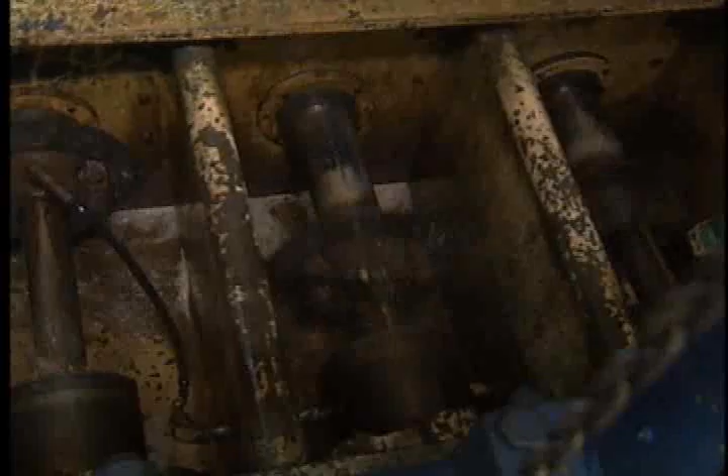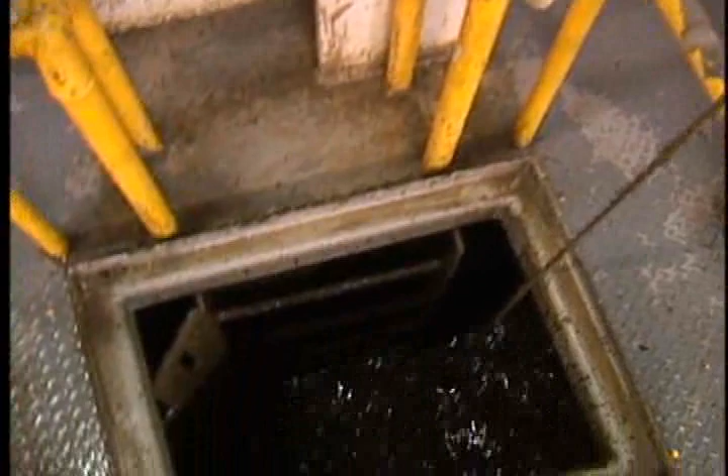In this program, we'll concentrate on mud circulation. Mud is the pit watcher's concern. It's in the hole where mud does most of its work. It jets out of the bit and carries cuttings to the surface. Also, mud cools and lubricates the bit, keeps the borehole from caving in, and holds formation pressures in check.

That's right, a hole properly full of mud that has the correct weight or density keeps formation fluids that are under pressure from entering the hole.

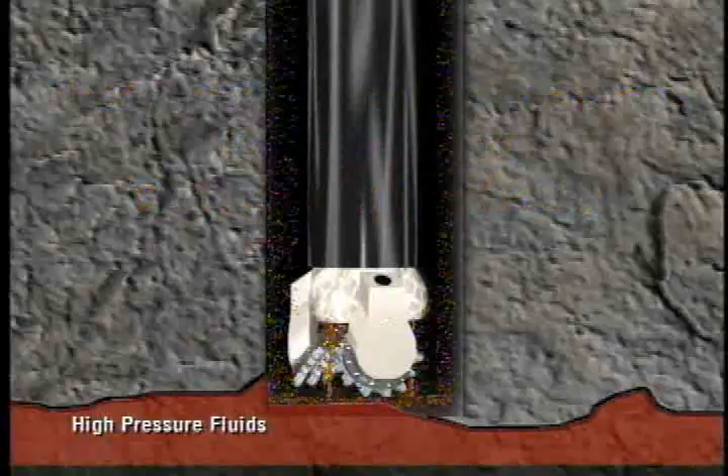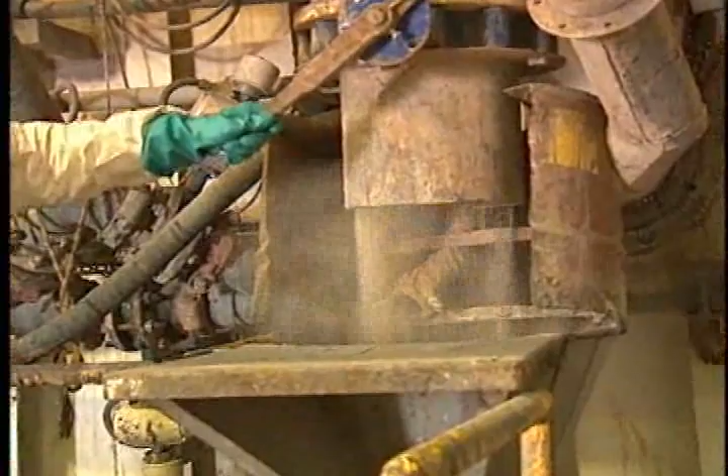Water, oil, or both form the base of most drilling mud. Rig crew members add clays and minerals to the basic liquid to give it desirable properties. One is the mud's weight or density. To find out a mud's weight, you can use a mud balance.

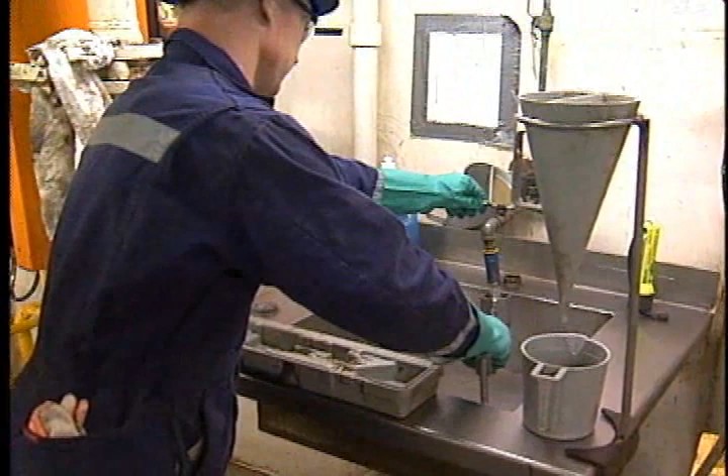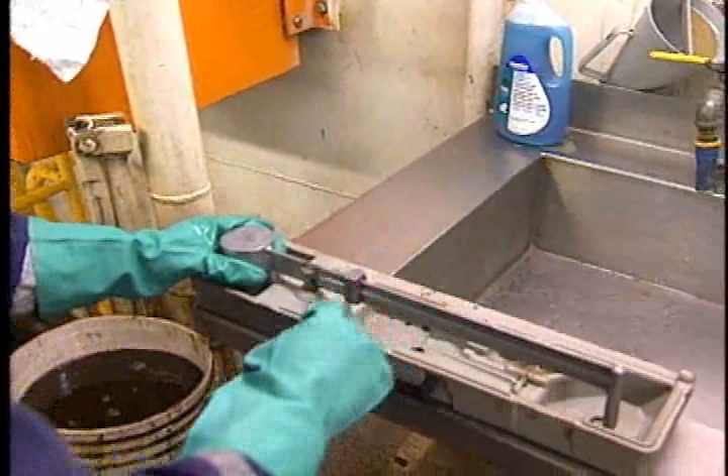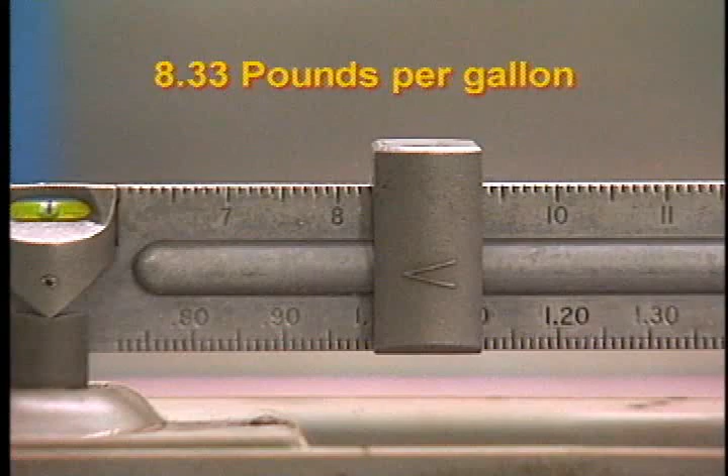First, let's watch a crew member weigh clear water. Looks like the water weighs a little more than 8.3 pounds per gallon. This mud balance is correctly calibrated because cleaned fresh water weighs 8.33 pounds per gallon.

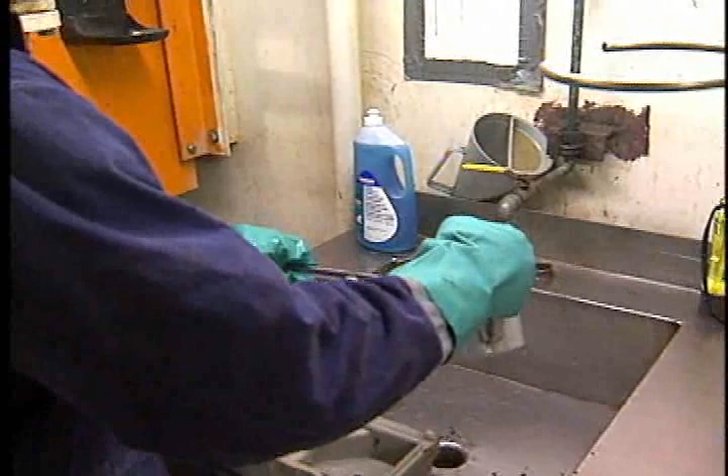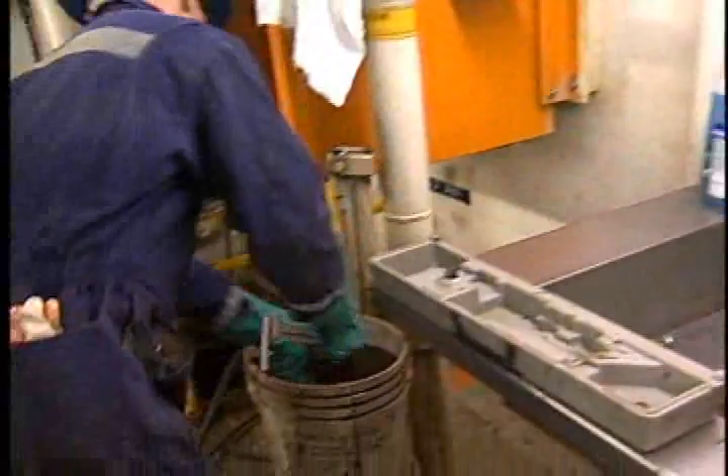Now, let's watch him weigh a sample of drilling mud that has clays and weighting material in it. This particular mud weighs about 14.6 pounds per gallon. Mud weight is important because the more mud weighs, the more pressure it exerts on the bottom of the hole.

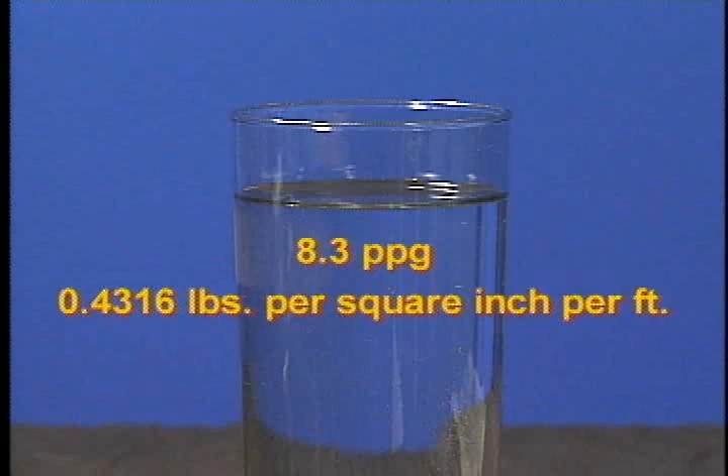For example, clear water that weighs 8.3 pounds per gallon exerts 0.4316 pounds per square inch per foot of depth. So here's a hole 1,000 feet deep full of water. The water exerts 431.6 psi at the bottom of the hole.

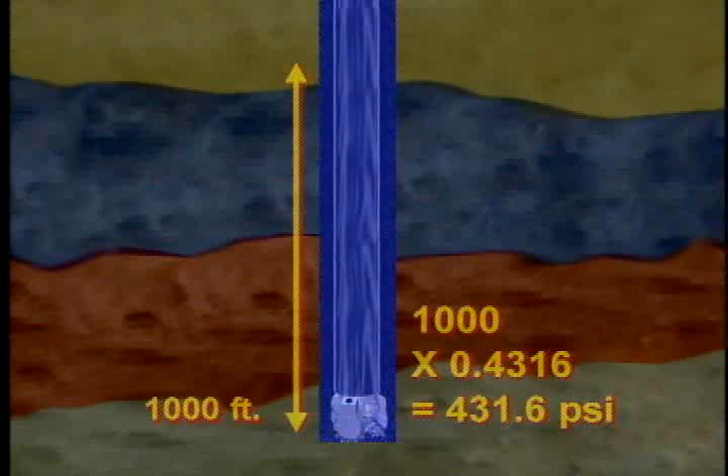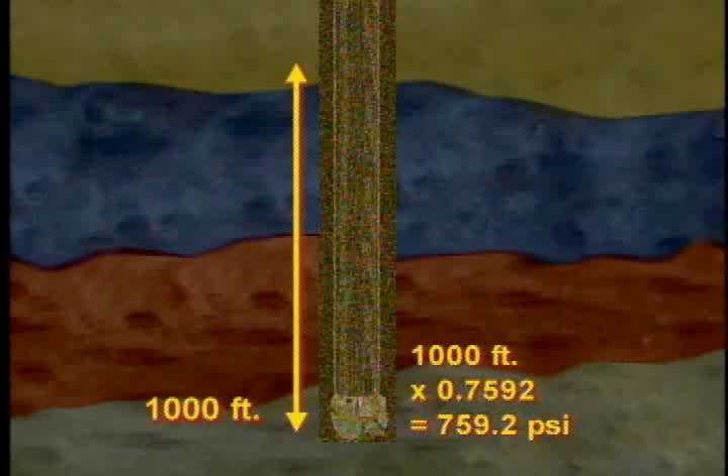Here's the 1,000-foot hole again, but now it's full of mud that weighs 14.6 ppg. This mud exerts 0.7592 psi per foot. Thus, the pressure on the bottom is now 759.2 psi. The heavier mud exerts over 300 psi more than clear water.

But what if the mud is not dense enough? Its weight is too low and it doesn't develop enough pressure to offset formation pressure. Formation fluids flow into the well. This is called a kick.

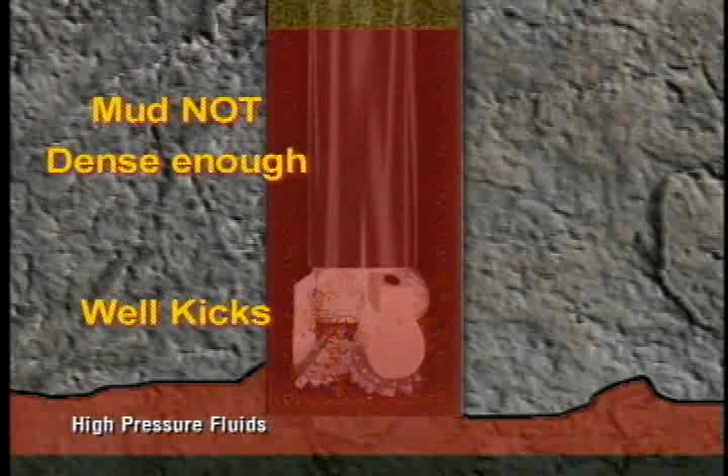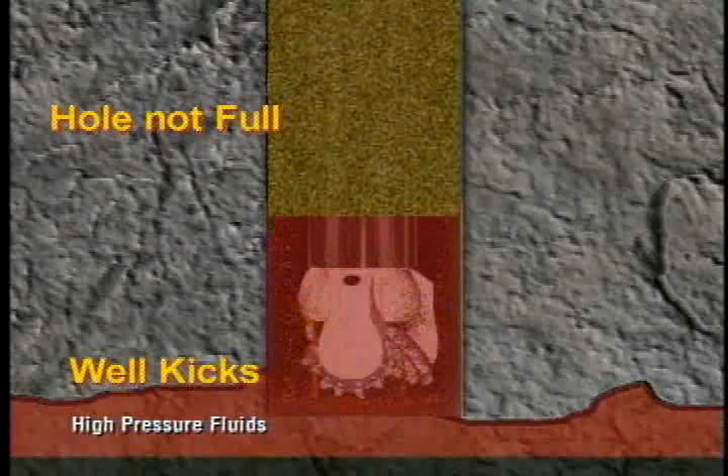Or what if the hole is not full of mud of the proper density? Same as before, formation fluids enter the hole. The well kicks, and if the rig crew fails to control a kick, the well could blow out. Nobody wants this to happen. It's dangerous, costly, and should never occur.

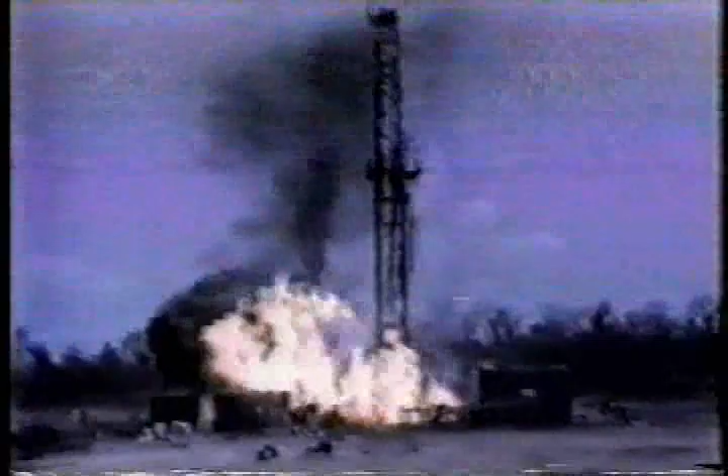And here's the thing: if you're assigned to watch the pits on your rig, you play a big part in preventing this. So, pit watching is an important job. In this program, we'll cover the responsibilities and duties of the pit watcher.

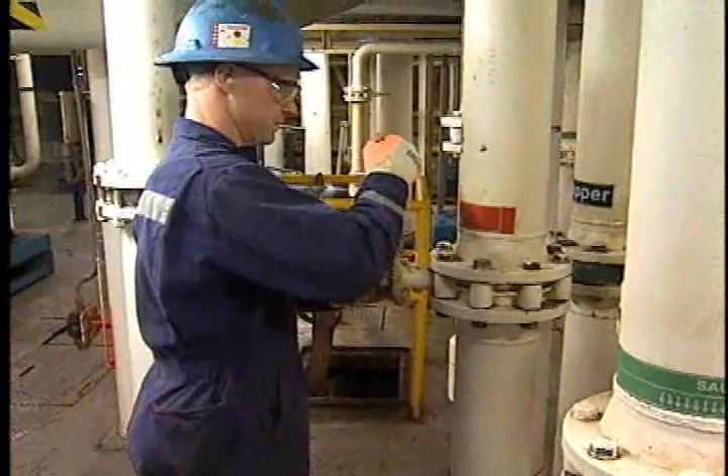In a nutshell, the pit watcher's main job is to observe, record, and report to the driller any changes in what's going on with the mud. The duty station is around the mud tanks, or pits as they're commonly called.

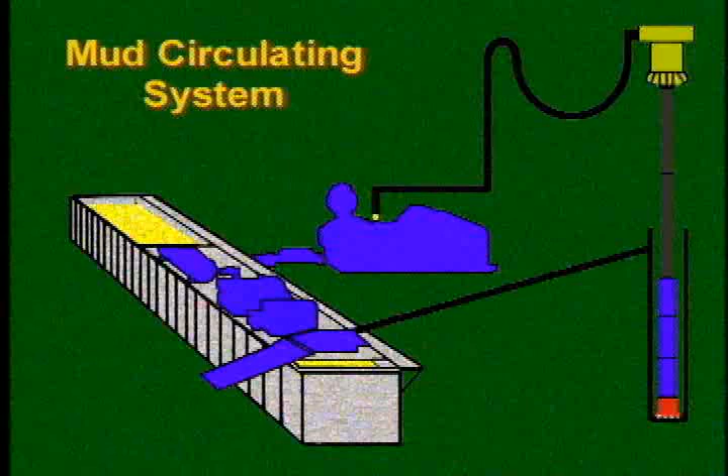To better understand the job, let's look at the basic parts of the mud circulating system. First, the pump sends mud through the discharge line, up the standpipe, into the rotary hose, and through the top drive. Mud then goes down the drill string and out of the bit, where it picks up cuttings and cools the bit. Carrying cuttings, the mud moves up the annulus, the space between the drill string and the bore hole.

At the top of the hole, the mud flows into the return flow line. It then falls through the shale shaker and into the first mud tank or sand trap. The shaker helps condition or treat the mud by removing larger cuttings.

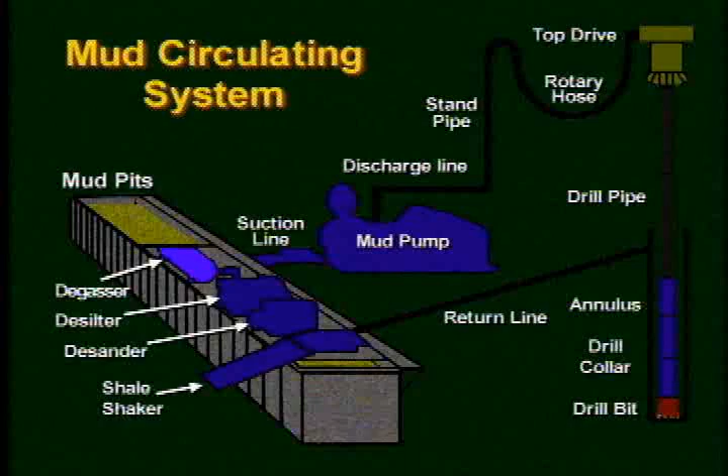Once in the tanks or pits, the mud may go through a desander, a desilter, and a degasser before going down the hole. Sometimes it goes through a mud cleaner and centrifuge too.

For details, let's start at the shale shaker. This vibrating set of screens removes cuttings from the mud as it returns from the hole. It's the first piece of cleaning equipment the mud encounters after it leaves the mud return line. It's something like a big sifter or sieve.

For the shaker to do its job, you have to keep it properly adjusted. Here's how a properly adjusted shaker looks: the last of the mud falls through the screen near the end, virtually all the cuttings are running off the screen, and no mud flows with the cuttings off the screen.

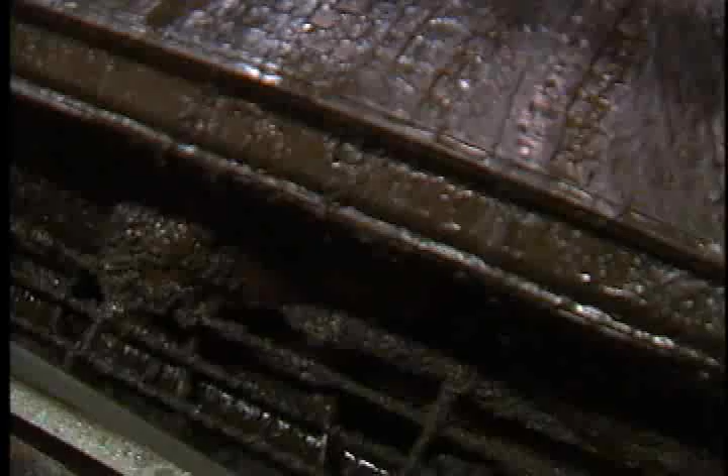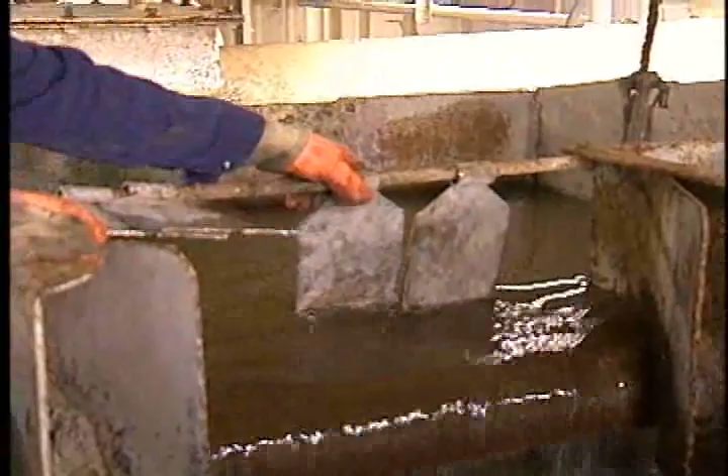It's easy to correct problems. First, adjust the flow to decrease the amount of mud flowing over the screen. Then increase the flow a little at a time, until the last of the mud falls through just before the screen's end. The cuttings will fall off the end of the screen.

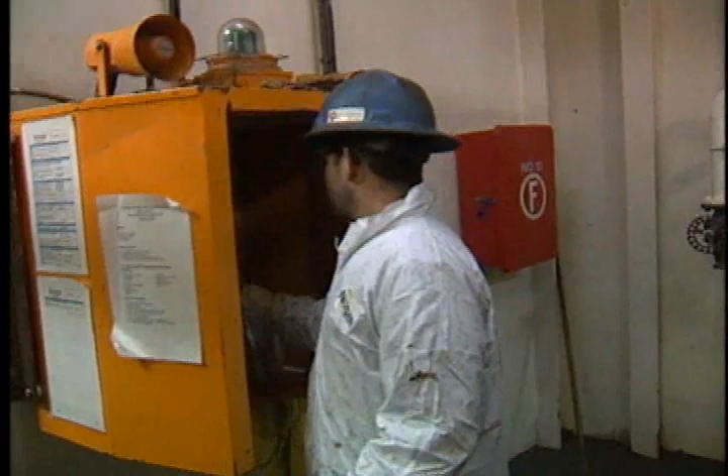Keep your eye on the cuttings. What you're looking for is changes, like a change in size or shape—they get smaller or bigger—or a change in the amount, more or fewer cuttings than before. Cutting changes indicate downhole changes. Maybe the bit has simply penetrated a new formation. But it could also be that a kick is about to occur or has occurred.

After the shaker, the mud may flow through a degasser. It removes small volumes of gas the mud picks up from a downhole formation.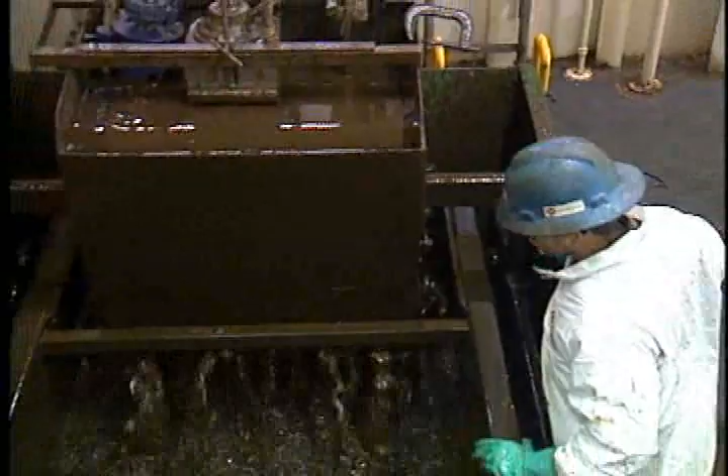Be alert for gas cut mud. It has a bubbly or frothy appearance. Notify the driller if you see it. He may have you turn on the degasser.

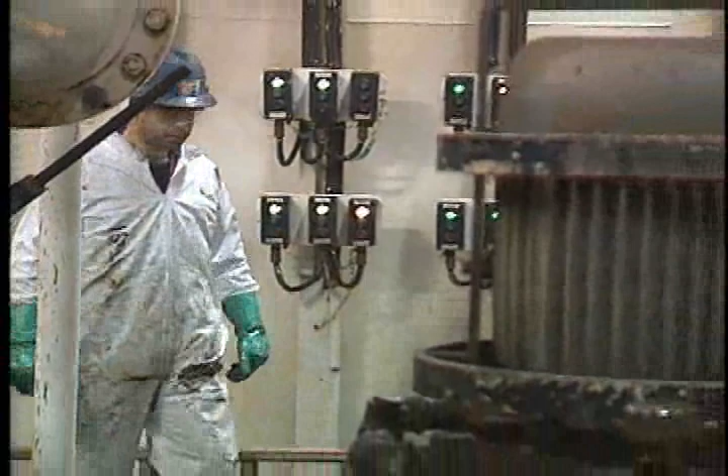Don't recirculate gas cut mud. The gas can cause the mud pump to gas lock. A gas lock pump cannot pump efficiently. What's more, gas lowers the mud's weight. Thus, recirculating gas cut mud could lead to a kick.

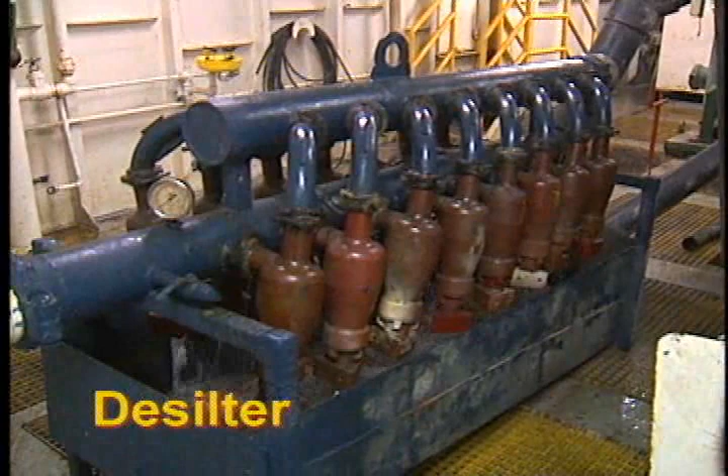After the shaker, the next piece of cleaning equipment the mud may go through is a desander. After the desander, mud usually goes to the desilter. Both remove small solids from the mud that fall through the shaker. The desander removes larger particles, the desilter the smaller ones.

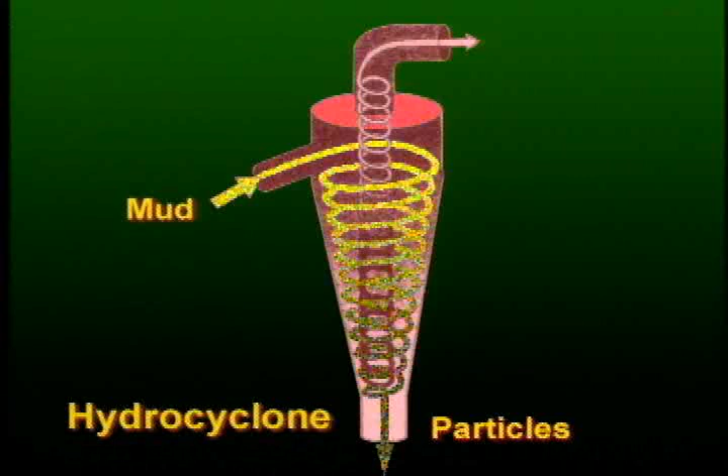Both work the same way. Mud enters through the side, hits the cone, and rapidly swirls around like a cyclone or a tornado. Centrifugal force carries the heavier particles down through the bottom of the cone. Vortex action discharges the clean mud out of the top of the cone.

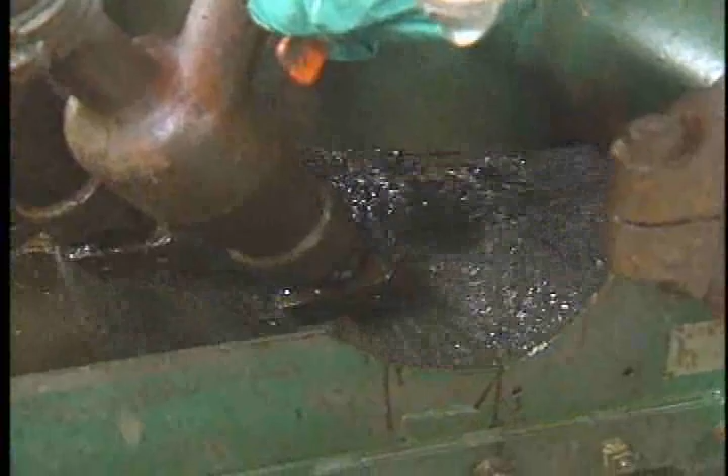You need to check the stream of mud leaving the bottom of the cone. It should look like this, a spray in the shape of a hollow cone. But this is wrong, the discharge is like a rope. To correct the problem, all you do is adjust the flow until it's right.

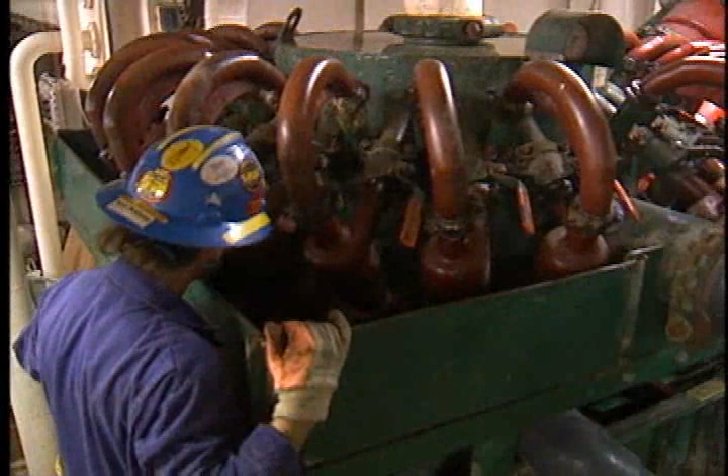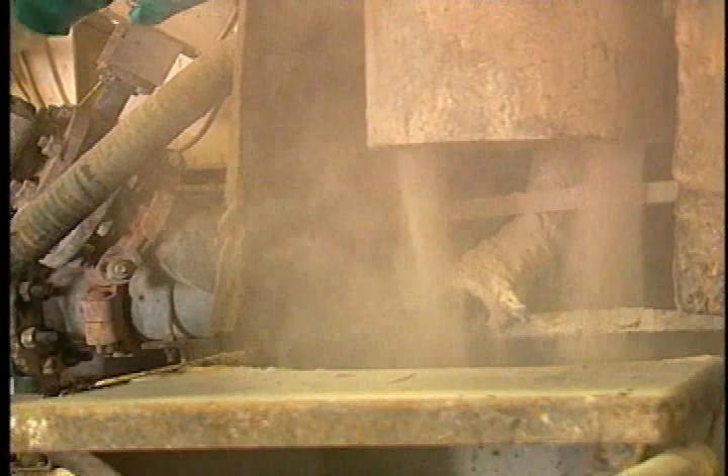A mud cleaner has hydrocyclones, like a desilter, but it also has a vibrating fine mesh screen below the cones. It removes almost all the solids from the mud except barite. Barite is a heavy or dense mineral added to the mud to make it weigh more. A mud with barite in it holds formation pressures in check. And actually, by installing an even finer mesh screen, a mud cleaner can remove barite from the mud. Barite's expensive, so it pays to retrieve it.

Adjust the lever to keep the discharge in the form of a cone-shaped spray.

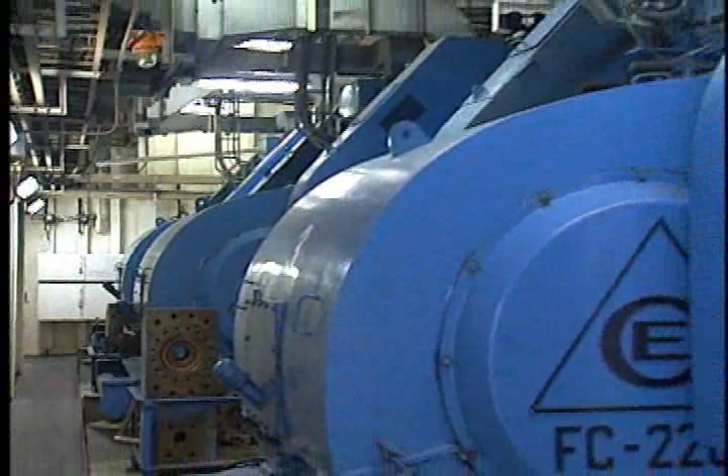Besides keeping an eye on the mud cleaning equipment, a pit watcher also needs to monitor the level of mud in the pits or tanks. Here's why. Mud circulates through a closed system. That is, the same mud circulates over and over. So if you see a gain or loss in the level of mud in the tanks, one of four things is happening.

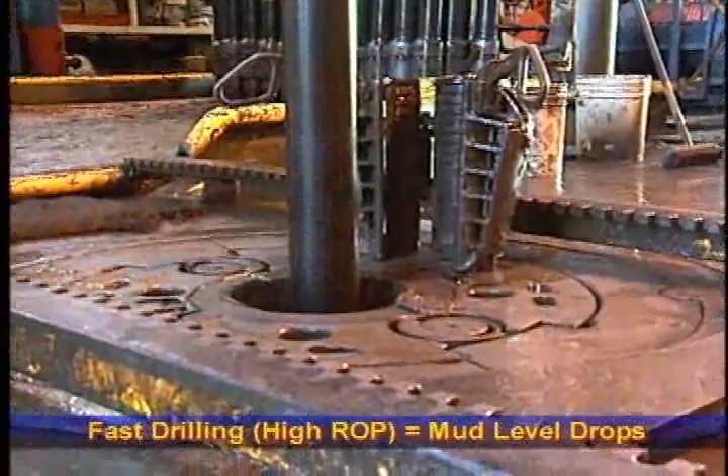First, when the rig is drilling fast, when the rate of penetration, the ROP, is high, the mud level in the pits drops noticeably. The mud fills the increasing volume of the deepening hole.

Second, something changes on the surface, like when you or other crew members mix, jet, or transfer mud. In such cases, the pit level may increase or decrease. It depends on whether you add to or take mud from the pits.

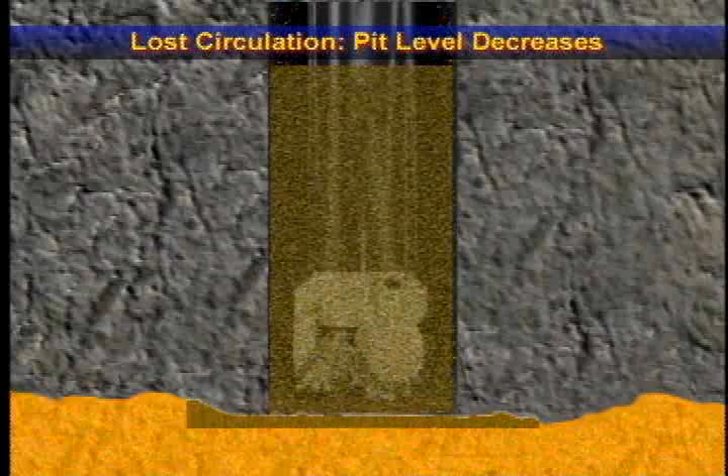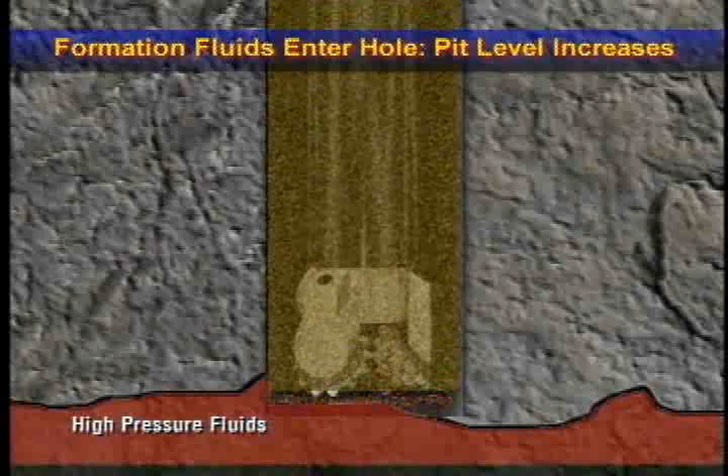Third, the hole penetrates a formation that takes mud. This is lost circulation. Consequently, pit level decreases as mud goes into the formation. Fourth, formation fluids enter the hole. The well kicks, pit level increases. Formation fluids can enter the hole either during drilling or tripping.

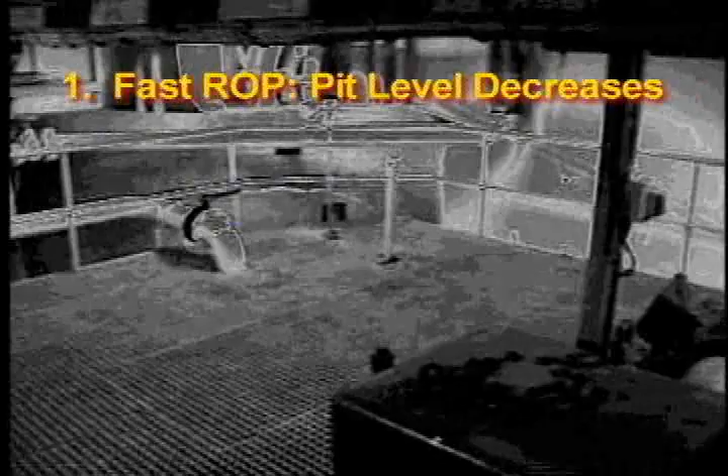To summarize: 1. Fast ROP, pit level decreases. 2. Surface changes, pit level increases or decreases. 3. Lost circulation, pit level decreases. And 4. Formation fluid entry, pit level increases. Pit watcher, be aware of changes in pit level.

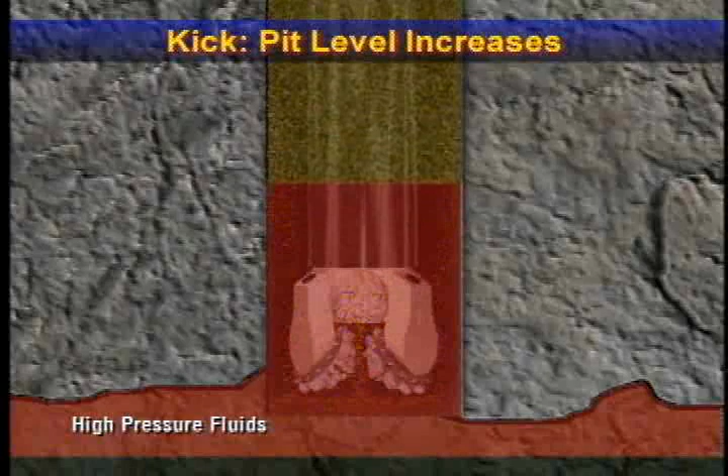If you ignore changes, serious problems can result. For example, a kick causes the pit level to increase. If not controlled, the well could blow out. So, if you detect a pit gain, an increase in pit level, and you haven't done anything on the surface to account for the gain, notify the driller right away.

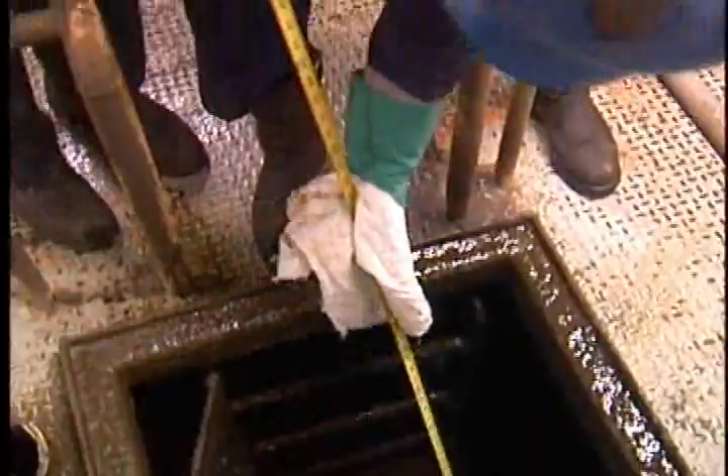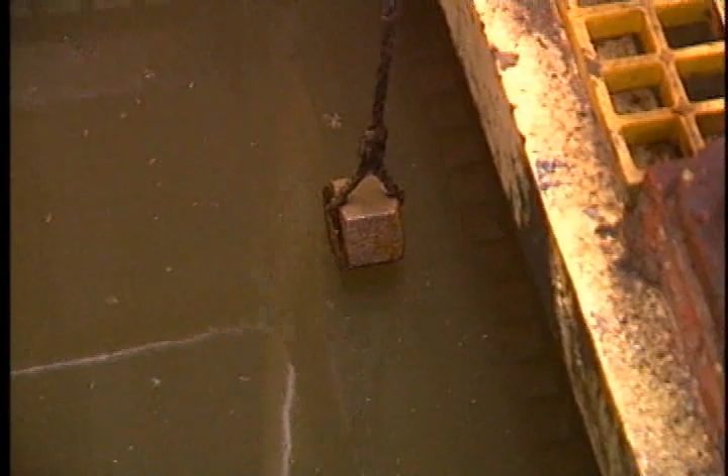One way to check for a change in pit level is with barrel or cubic meter gauges like these. Another way is to hang a steel nut on soft line near the mud level in the pit. Looks primitive, but it's fail-safe. So keep your eye on the level of mud in the pits and report any changes to the driller.

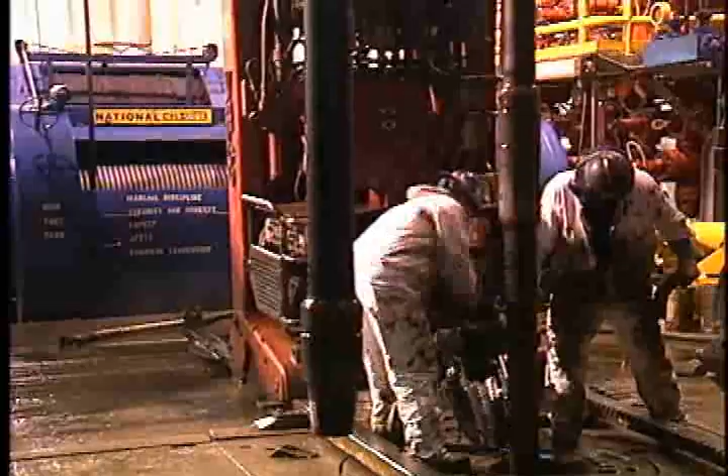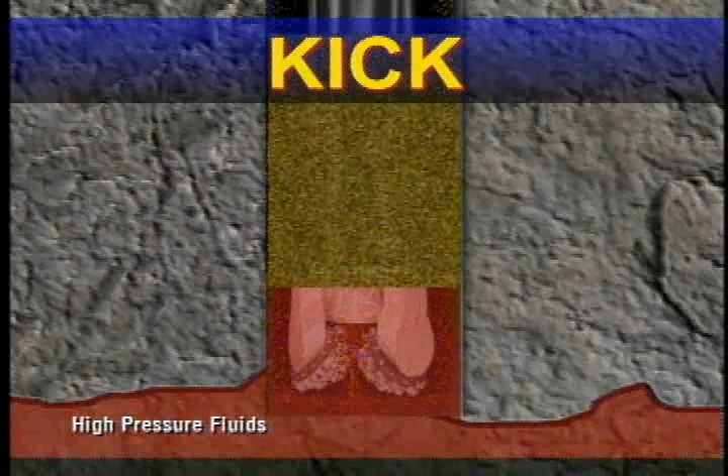You have to be especially alert to pit level changes when the floor crew trips pipe out of or into the hole. Keep in mind, a hole properly full of mud of the correct weight cannot kick. But if the mud level in the hole drops so the hole is no longer full of mud, the well can kick. With the hole not full, the mud doesn't exert the correct pressure.

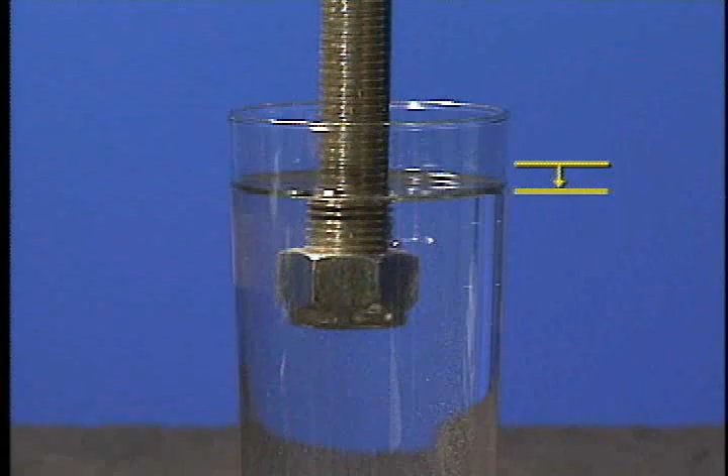So when the floor crew pulls pipe from the hole, the mud level in the hole drops. It's just like removing a rod from a container of liquid. As the steel comes out, the mud level falls. It's very important to put mud in the hole to replace the pipe taken out.

But here's another wrinkle. When pulling pipe, the drill string and bit can act like a piston in a cylinder. The bit pulls or swabs formation fluids into the hole. Swabbing is a lot like filling a syringe. The plunger inside the syringe is like the bit in the hole. The pressure drop created by the plunger or bit pulls the fluid right in.

The hole may actually be full of fluid, but not uniformly full of mud. The mix of mud and formation fluids may not have the proper weight or density. Swab in enough formation fluids and the well can kick.

During trips, the driller keeps careful track of the amount of mud he puts into the hole to replace the drill string steel. He compares the amount the hole should take with what it actually took. If the figures don't match, he knows he may be swabbing fluids into the hole.

As a pit watcher, be aware that when the floor crew trips pipe, you need to keep a close watch on the level of mud in the pits. Report a pit gain immediately.

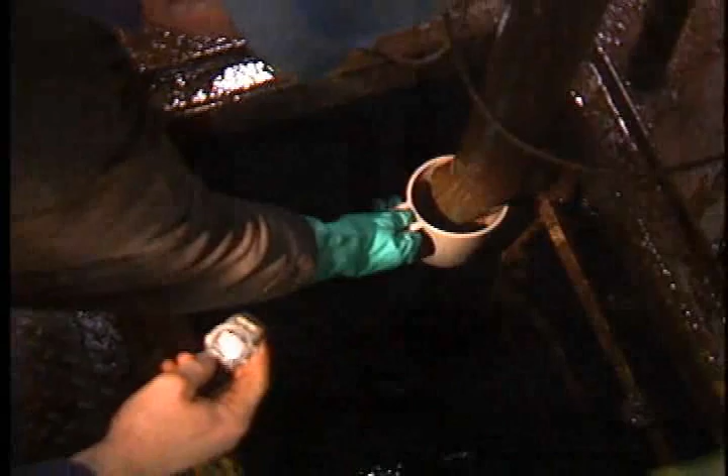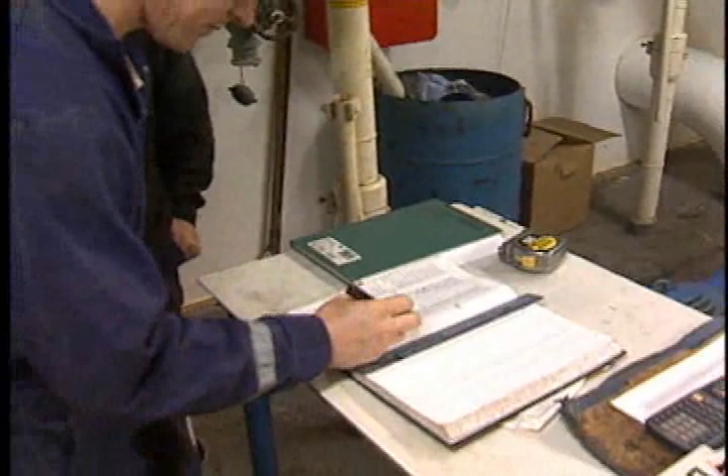Another pit watcher job is to catch a sample of mud and measure and record its temperature. Here it's 68 degrees Fahrenheit. Knowing the mud's temperature is important because certain muds perform best at certain temperatures. Also, temperature changes can signal the possibility of a kick. So carefully measure and record mud temperature every 15 minutes during drilling operations.

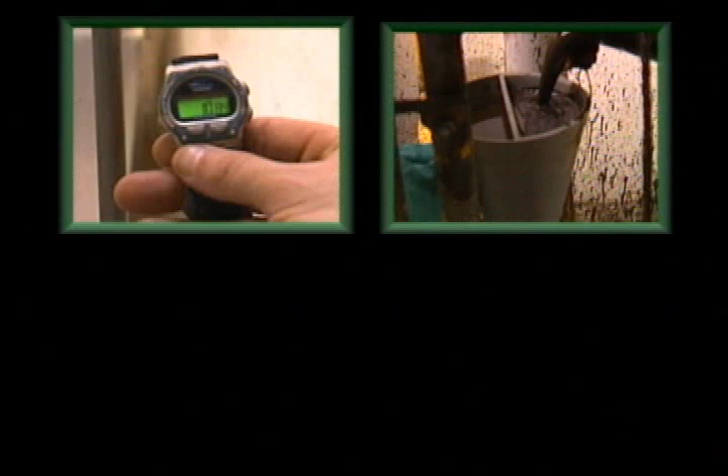For the next measurement, pour the sample through the screen in the top of this special funnel. It's called a marsh funnel. At this point, all he's doing is filtering out any lumps in the mud sample. Now get a stopwatch, your mud sample - you'll need a little over a quart or a liter, a graduated container to catch the sample, and the marsh funnel. You're going to measure the mud's viscosity, its resistance to flow.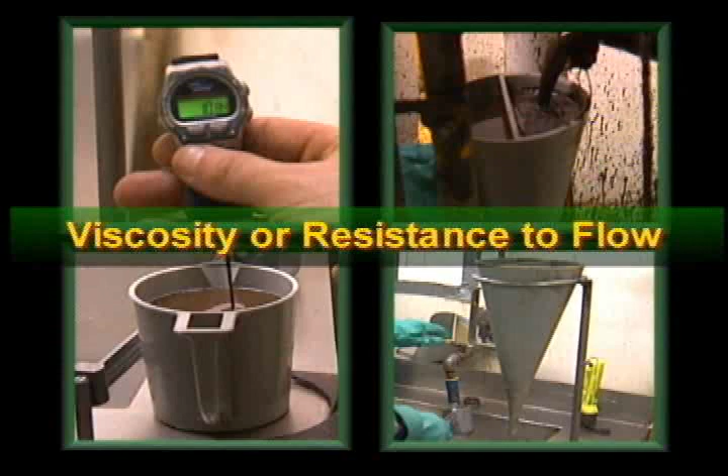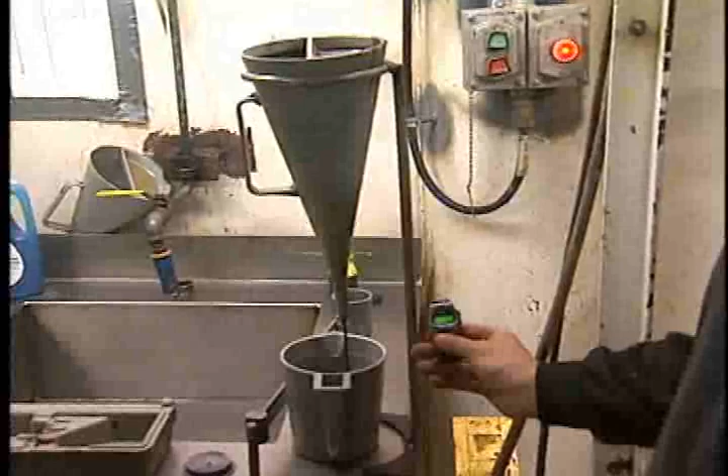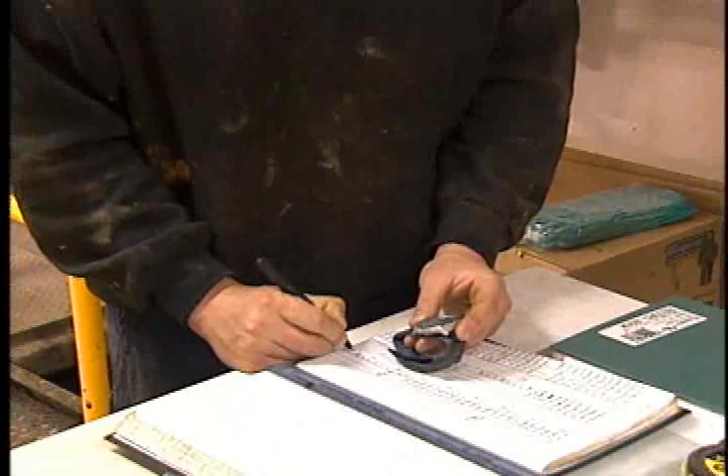First, stop up the end of the funnel with your finger. Then fill the funnel with mud. Next, start the stopwatch, and at the same time remove your finger from the end of the funnel. Let the mud flow into the cup. Carefully note when the mud fills the cup to the full mark, the 1 quart level. At this point, stop the watch. Finally, note the number of seconds it took for the quart of mud to flow from the funnel into the cup. Write this number down on your mud log.

Here the mud's funnel viscosity is 70 seconds. When drilling, you should perform this test every 15 minutes, 24 hours a day. If you notice a change in viscosity, report it immediately to the driller. A viscosity change could mean that formation fluids have entered the hole - a kick may be in the making.

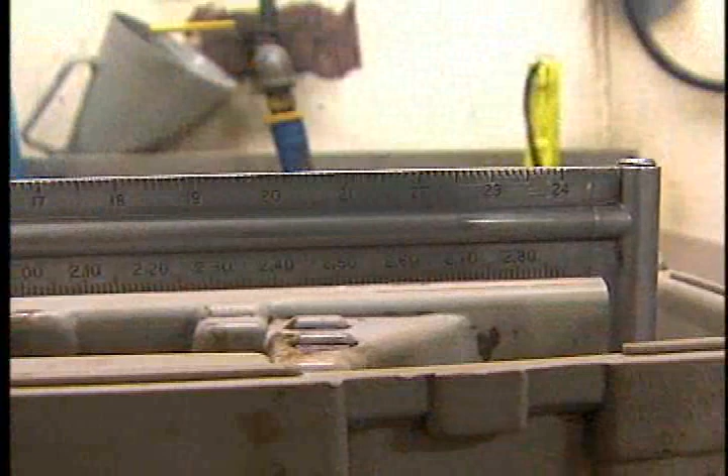The next job is to determine the mud's weight or density. Mud weight is important because it keeps the well from kicking. You use a mud balance like this to weigh the mud. It has a beam with a sliding weight, calibrated to show the mud's weight. This one has pounds per gallon at the top and specific gravity at the bottom.

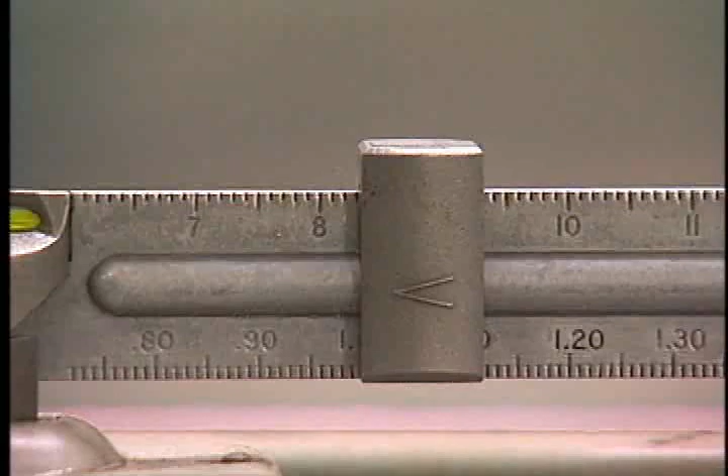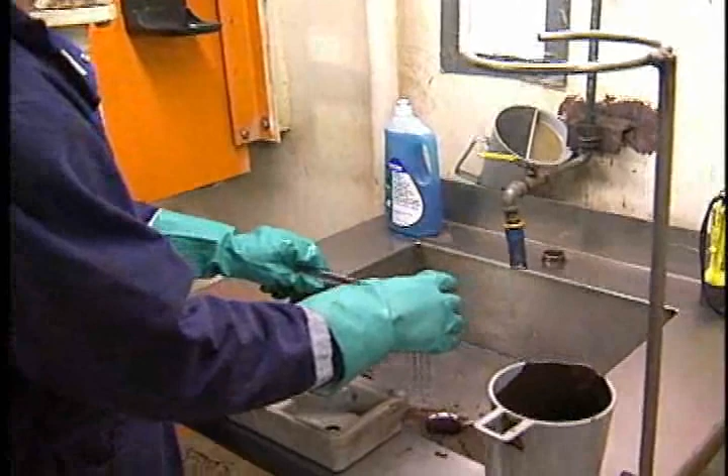To weigh the mud, fill the cup on the balance until it overflows. Dip the cap in mud, then spin the cap to force out the air. Put your finger over the cap's air hole and wash off excess mud on the cup and beam. Dry it and put the beam in the fulcrum and balance the beam.

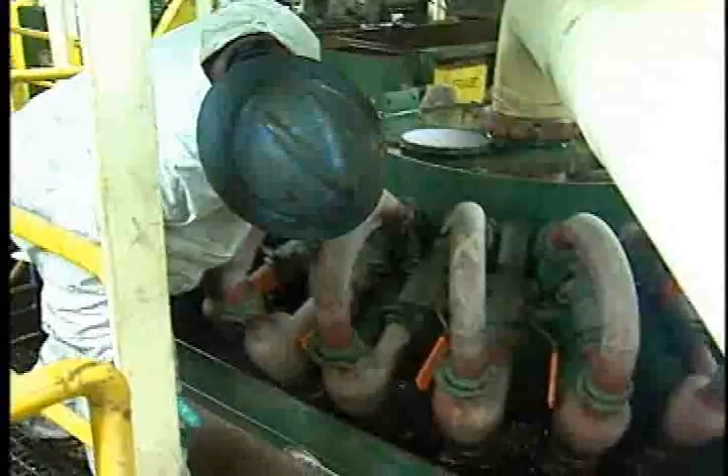You've seen that the job of pit watching is vital. It requires skill, patience, and the ability to make quick and good decisions. So let's review what we've covered.

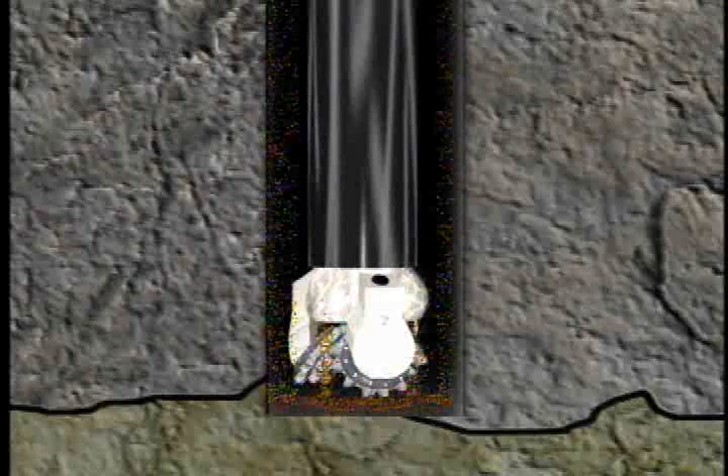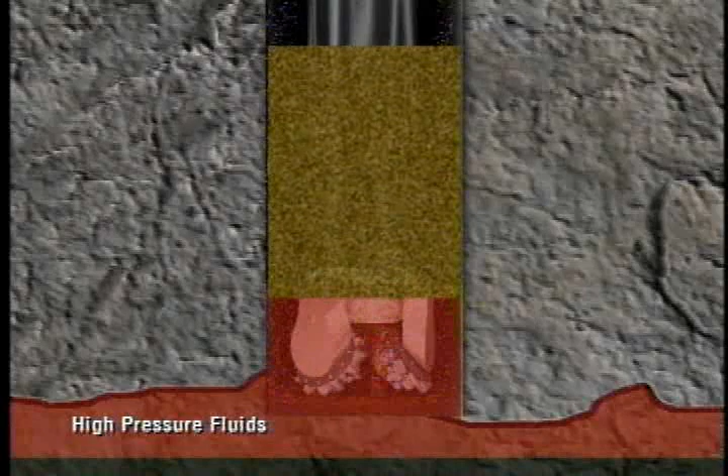You saw that a hole properly full of mud that has the correct weight keeps formation fluids from entering the hole. You also saw if the mud weight is too low, or if the hole is not full of mud, the well can kick. And if a kick is not controlled, well, you know it can happen.

You saw the route drilling mud takes as it circulates through the system, and you saw the operation of the shale shaker, the degasser, the desander, desilter, and mud cleaner. We pointed out that you need to note changes in cutting size or quantity - a change in the cuttings could mean a kick.

We noted that it's important to look for pit level changes, and we gave causes of pit level changes. You saw that fast ROP means pit level decreases, that surface changes mean pit level increases or decreases, that lost circulation means pit level decreases, and that formation fluid entry means pit level increases.

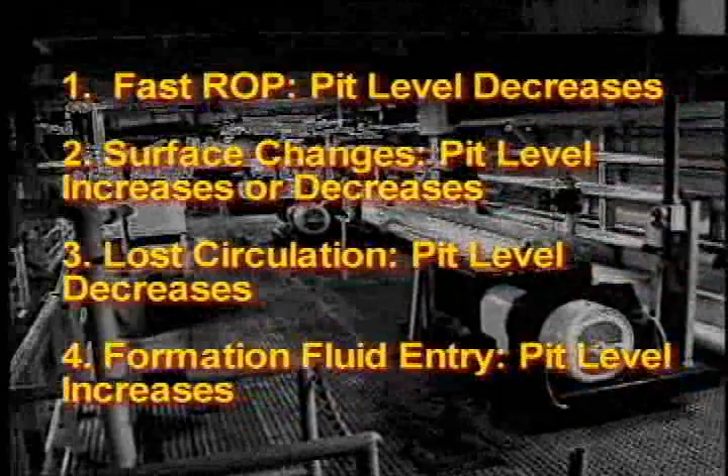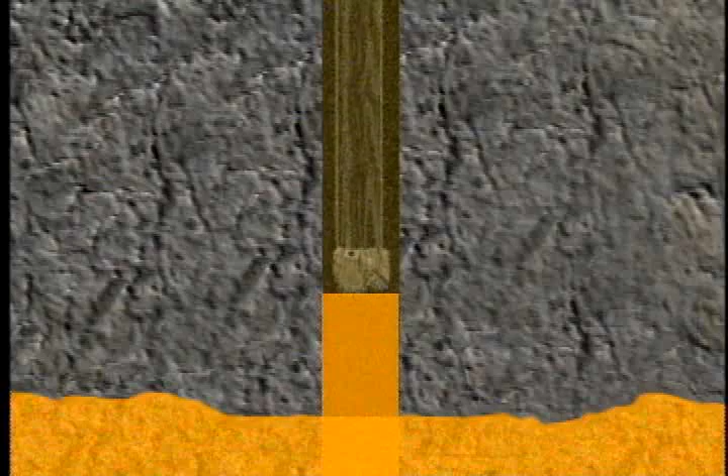You also saw that when pulling pipe, the crew must keep the hole full of mud. The crew also has to be aware of swabbing fluids into the hole.

Finally, we showed taking the mud's temperature, its viscosity, and its weight. All are important to kick recognition. And remember, inform the driller of any changes or problems. Doing your job right helps keep the bit on bottom and turning to the right.